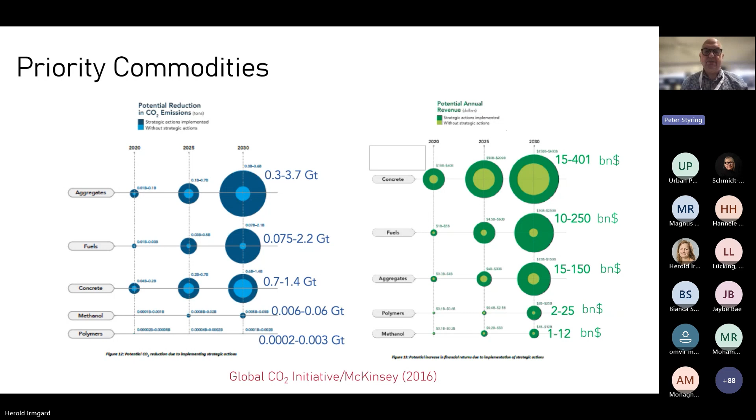I just want to go quickly into what we really need to think about now. This is a theory put forward by Peter Thiel back in 2014, about how we build new technologies. On the x-axis you've got globalization, where you have a potential product and you grow it up to a value N.

I think something's missing there—the N should be time dependent, so it should be dN by dt. How do you get there at speed? On the y-axis is technology, the 0 to 1. You start off with something conceptual, in your mind, and then you go to 1, which is the starting point for any business. Once you've established yourself, you can start looking at globalization, which is the growth.

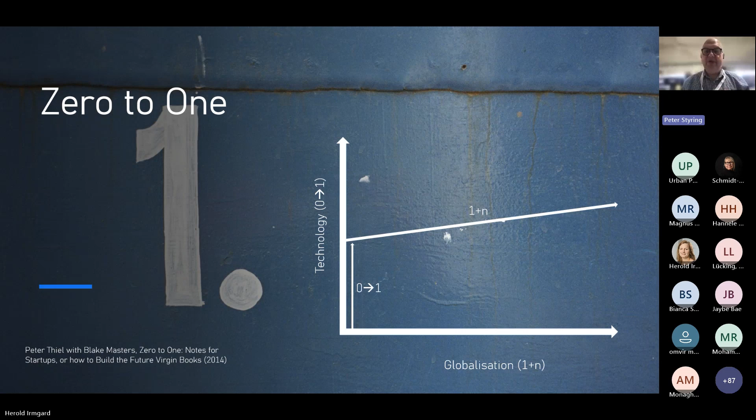Next slide, please. And that's really where we need to look at now. So I want to give one specific example.

This is a project I've been involved in called Flue2Chem, where we're taking flue gas—initially from the steel industry, but as you may realize, UK steel industry has had a few problems recently—so we're also taking it from paper mills. You'll see Holmen Iggesund, a Swedish company, and UPM Biofore, a Finnish company with operations in the UK. We took emissions from those two factories, from the biomass conversion units, and looked to convert them into surfactants that could be used in home care products.

Next slide, please. Why are we doing this? Well, if we look at the chemicals industry, we have a predicted growth of around 2%, 2.5% per annum, which means if we take the 2020 value and project it to 2050, where we're expecting net zero, we're looking at 5.5 billion tons of chemical products being produced.

Now, at the moment, most of these are from fossil-based sources, as you can see from the black bar. But because we're going to net zero, we have to diversify and take those from CO2-based products, recycled carbon products, and also bio-based carbon products. The problem is that as oil dependency decreases, that 5% of the barrel that goes towards chemicals could easily be lost if we don't intervene now. Next slide, please.

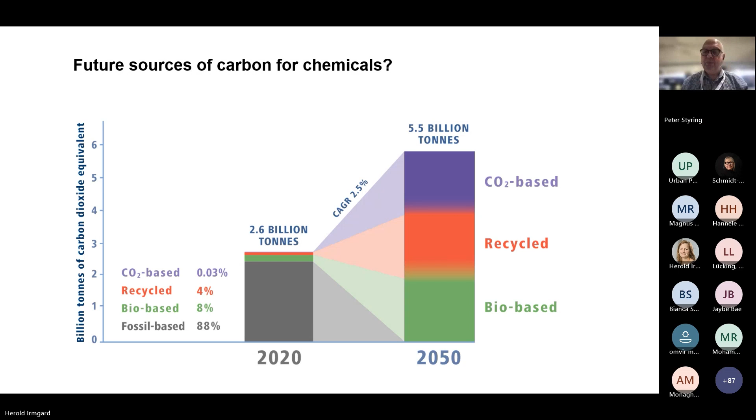So why did Flue2Chem come about? It was a long transition—it took three years to establish, and we were given two years to deliver a new industry. We realized net zero will not be achieved unless we look for another source of carbon. Carbon dioxide is one of the main contributors to global warming, and therefore, if we can use CO2 at the right scale and the right cost, we have a feedstock which is readily available.

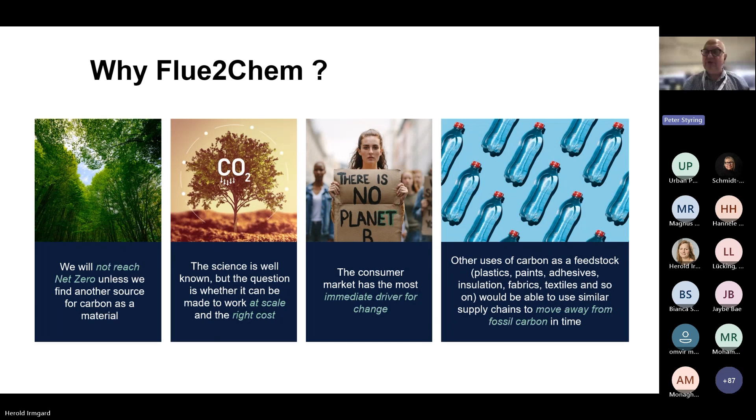The consumer market has the most immediate driver for change, so there has to be a social impact to this as well. But alongside CO2, we need to look at other feedstocks of carbon, including plastics and paints—the list is endless, and that's just on the carbon side. We also need to look at recycling other fossil-based products, such as calcium oxide, making calcium carbonate. Instead of extracting more calcium carbonate from the environment, can we produce it from waste stocks generated during the processes? Next slide, please.

I'm not going to go into too much detail about this—this will be on the slides as they're circulated. But why did we look at surfactants? Well, there is a huge market for surfactants, and particularly alkoxylated surfactants, things like alkyl ethylene oxides.

We want CO2 to be part of the value chain as a source from emissions. We want to convert it into hydrocarbons, to ethylene oxide, and manufacture the alkoxylated surfactants as we do the capture.

This is a unique project because we brought 17 partners together, most of which are competitors. You'll see there Unilever, who led, together with Procter & Gamble, Reckitt Benckiser, and Croda. These are usually competitors, but now we're working as a team. It was a £4.4 million project, of which 2.7 was grant funded, the rest being industrial leverage.

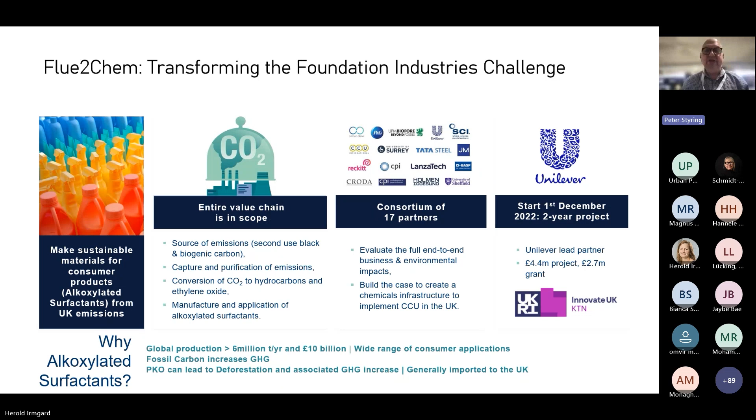The idea was to take these foundation industries, so Holmen, UPM, Tata Steel, and move forward to capture it using technology from the University of Sheffield, which is now patent pending and licensed to CCU International.

Carbon Clean weren't able to do any of the capture because of prevailing legislative issues, which is a huge problem. But then Sheffield, Johnson Matthey, BASF, LanzaTech, all making materials that would go into the final product, Croda producing the surfactants, and then the fast-moving consumer goods companies making the products, which we're going to announce in June in the Houses of Parliament.

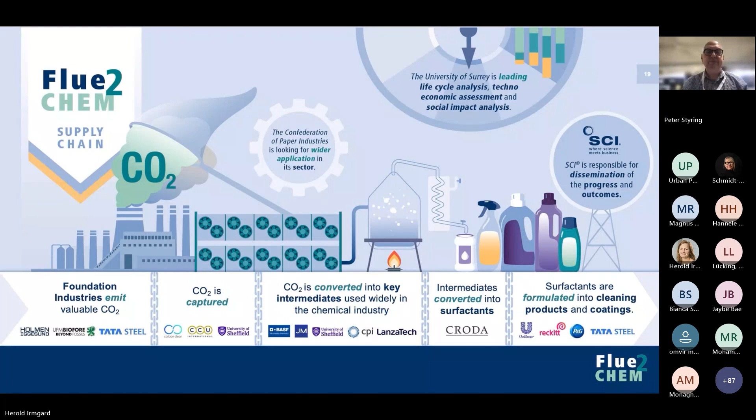This is just to show the commercialization is a long journey. The capture unit, the FluRefin system, is a pressure swing adsorption system. We started it in 2011. It's only recently started to go to capitalization. It's gone through a long history of development before we can introduce it to the market.

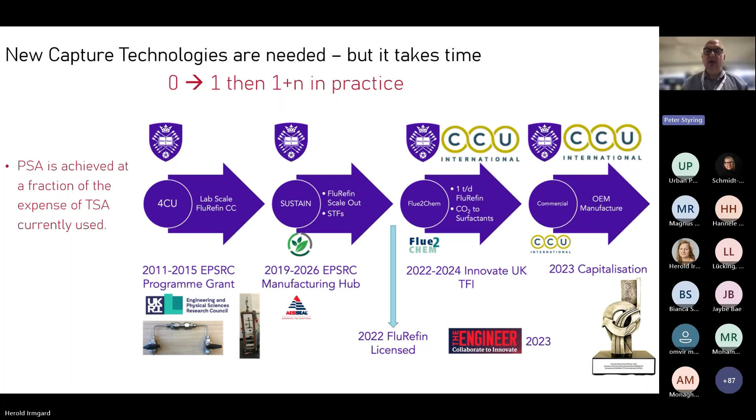But now, as we said, it's won awards - The Engineer, Collaborate to Innovate, and recently the iChemE Global Award for Startup Company of the Year. But how has that affected what we've done in Flue2Chem?

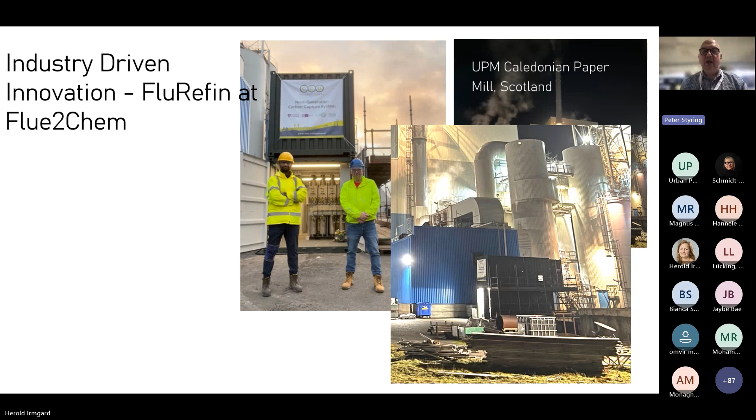What do we do with the CO2 that we capture? Well, we convert it into surfactants. In this case, the byproduct is also synthetic diesel, which you can use to power an engine. So we're starting to do it at scale. We now need to go to bigger scale.

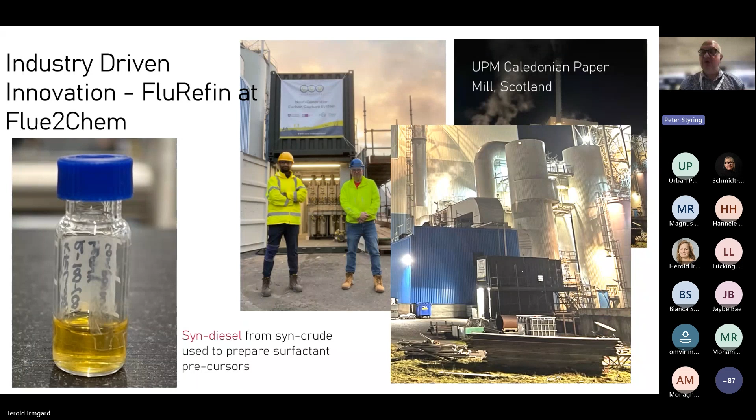Part of the issue is the regulations surrounding use of the different systems on existing power plants, because you have to go through a change of use protocol.

So to conclude, what have we learned so far from the Flue2Chem project in terms of how we go to industrial defossilization? How do we go towards net zero? The first thing we realize is we are going to need a lot of green hydrogen, not blue hydrogen, not black hydrogen, but green hydrogen. There is a possibility that we might be able to use white hydrogen or gold hydrogen, so geological hydrogen, but we need hydrogen.

Getting things to the right place is a challenge. We have to get things onto a site, and putting something new onto a site is full of regulatory problems. We couldn't make that synthetic diesel on site because it would have taken 2 years to get the permits through to do that, by which time the project would have finished.

Biology can't make you dodecanol, which is what we need. Thermocatalysis can, but it can't make a lot of it. The UK in particular is missing a lot of necessary scale-up facilities. That's not necessarily true in Europe, but something needs to be done on a European-wide scale.

Planning is good, but nothing can compete with engineers on site. You can do all the models you like, but you need someone with a spanner and a hammer to actually get the thing working. Regulation and fiscal policy needs to be better aligned with net zero goals. This should not be seen as a mitigation technique. It will help mitigation, but it should be seen as an enabling technology to allow the chemicals industry to survive in a net zero future.

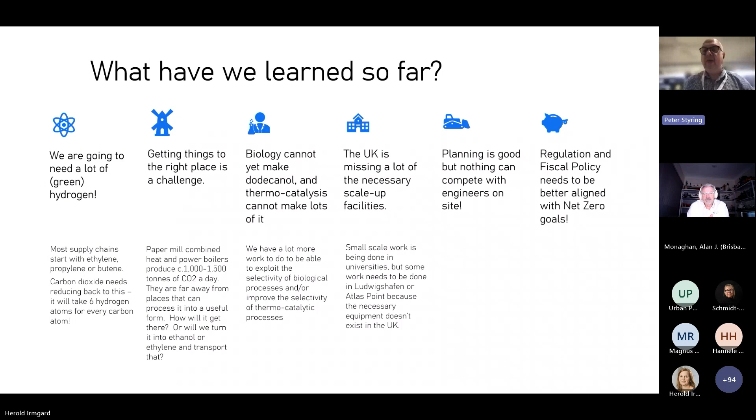And with that, I'll say thank you and happy to take questions.

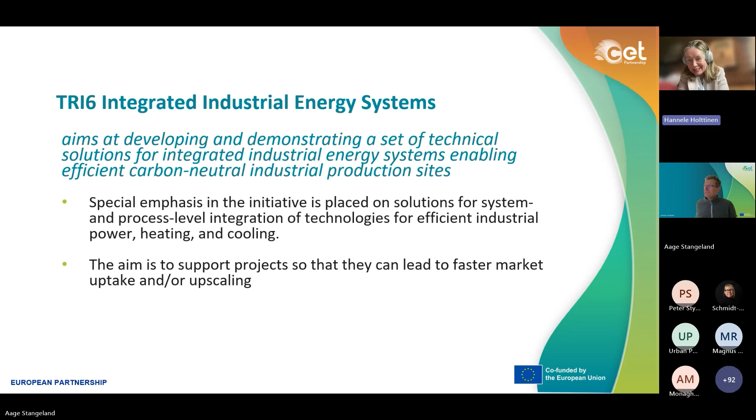Next, we have an example showing our knowledge community and impact maximizing event. We had two events together with our two focus areas on industrial systems and CCUS. We invited first Northern European and Central European industries to a 3-hour online workshop, and then had another event for Southern European industry. From these two events we made these summaries - we had two sessions, first looking at the research, development and innovation needs, and then the operational environment and market shaping. Åge, would you like to tell us more about the summary of the RDI needs?

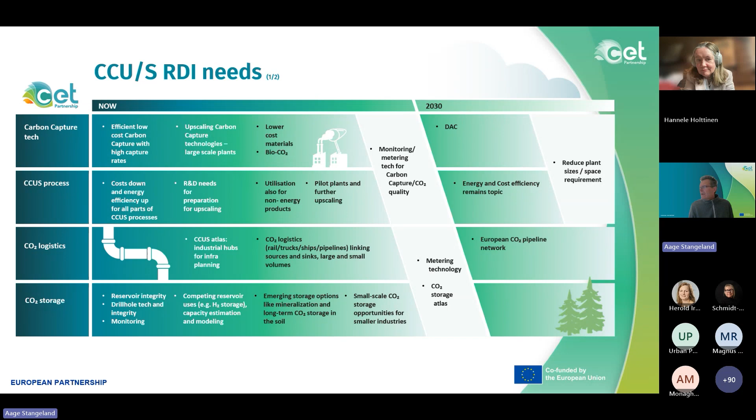We need to develop standards. When we transport CO2, we need good control of impurities and the quality of the CO2 stream, so we need to research that more. Environmental impact will also be important. We need good life cycle assessments and sustainability, and this should be part of all kinds of research activities.

Furthermore, cross-cutting topics will also be very important. One thing coming up on cross-cutting is artificial intelligence, a new technology that could be very helpful within capture, utilization, transport, and storage of CO2. Also on cross-cutting, we need capacity building. There's a need for labor requirements; we need to educate future experts. So it's, in general, quite wide aspects that we need to focus on, from capture to utilization and storage, and also the cross-cutting topics and business models.

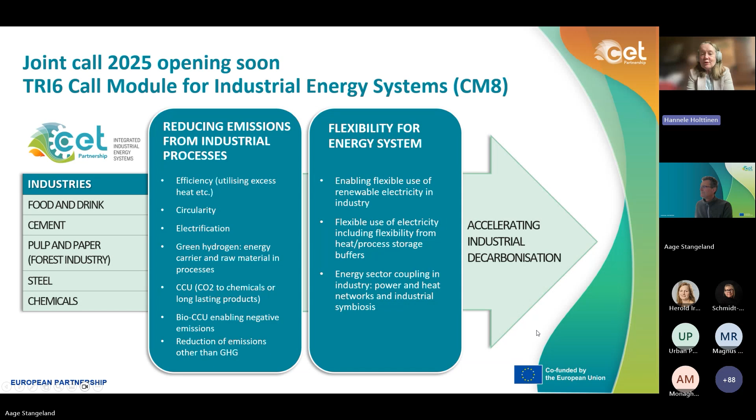So, Åge, what about your call module for CCU technology? Yes, I didn't include a slide for my call modules, but we have 2 call modules that are quite generic on CCUS, developing new technology, also addressing the cross-cutting issues that I mentioned. And we have 1 call module on hydrogen and renewable fuels that is also targeting technology development and the cross-cutting issues. So overall, the call has several call modules, so it will be important for all applicants to look carefully into each of them so that you can figure out which is the right one for you.

The added value we have experienced so far in ongoing projects is that we see that we can have larger projects when several countries join forces and put money on the table, and then we can have partners from many countries. The project grows bigger, and bigger projects will have bigger impact, not only on the national scene but also on the international scene.

We also see that the CETP calls lead to strong and well-functioning R&D and innovation collaboration across borders. And also we see that in ongoing projects, there's a strong relation between academia and industry, which is highly appreciated from our side. We also see that international cooperation already in the research phase will increase the chances for transnational large-scale implementation of CCUS later on.

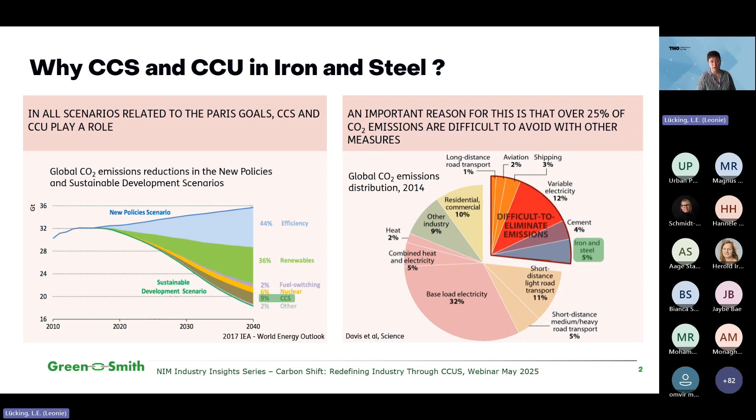And for this, generally what we see is there's a lot of emissions - per ton of steel, we have on the European side about 1.7 to 1.9 tons of CO2. The idea for how to go forward in general for the steel industry is to recycle more scrap - that's already something that's being done. Improve the efficiency of the iron making - that requires changes to the steel production process, even whole new furnaces. Switching of reductants - I think the most commonly known now is switching to hydrogen direct reduction. And lastly, capturing CO2. Within the GreenSmith project, we aim to address the last three of these.

Specifically looking at the capture of CO2 and permanent sequestration. We do this with what we call our StepWise technology, which is based on sorption-enhanced water gas shift. So in old terms, this would be called a pre-combustion technology - it's looking at gases that still contain CO and therefore energy, and what to do with this.

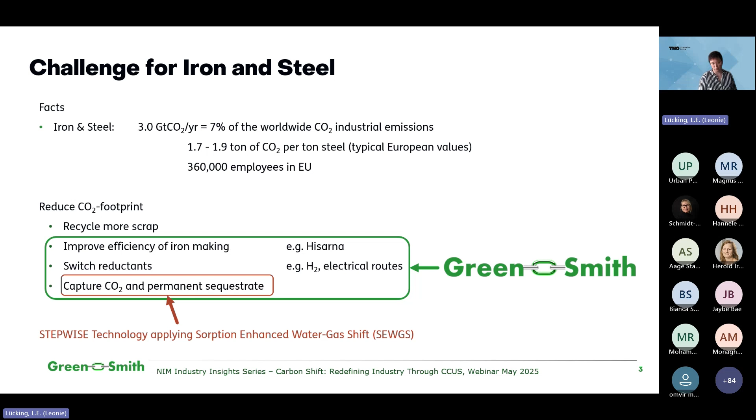In building up our technology, because I think this is also a very interesting part, is about how do you actually get a carbon capture technology high in its TRL. So we had low TRL projects along the line, but the most interesting ones, I think, are the higher TRL projects. So 10 years ago, we started the StepWise project, which looked at: can we capture CO2 from residual steel gases, and what is the performance? And actually, to our joy, we were able to outperform what we thought we would be doing.

So we had a low SPECCA, high cost advantage, and also a benefit of this technology compared to amine scrubbing is that it has better improvement on all LCA factors. So the material that's being used in this technology is basically a sort of clay, so it is leading to very little environmental impact, which is a massive benefit if you're looking at large-scale implementation.

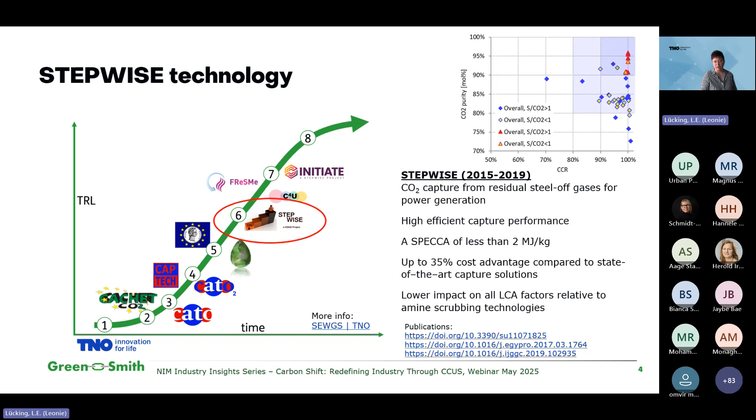Following this project, we looked at various versions of how to implement that in different ways. So we had the FReSMe project, where we looked at taking these off gases and turning them into methanol. The benefit of this is that we are reusing some of the CO2. The ratio is such that you will always have more CO2 than you can use with the hydrogen present in the gas.

But we were able to produce methanol from this. So all the way, we proved the production process to the point that we actually provided Stena Line with a certain amount of methanol, and they ran their ferry on this. So we really proved the full production chain, and also here we could prove that there's a positive business case for using this, rather than the standard process, which is just burning these gases.

In addition, we had the C4U project, where we looked at decarbonisation of the traditional steel mills. And we actually proved within a first-time demonstration that we could use decarbonised blast furnace gas to fuel the reheating furnaces. So in effect, decarbonising the later steps of steelmaking.

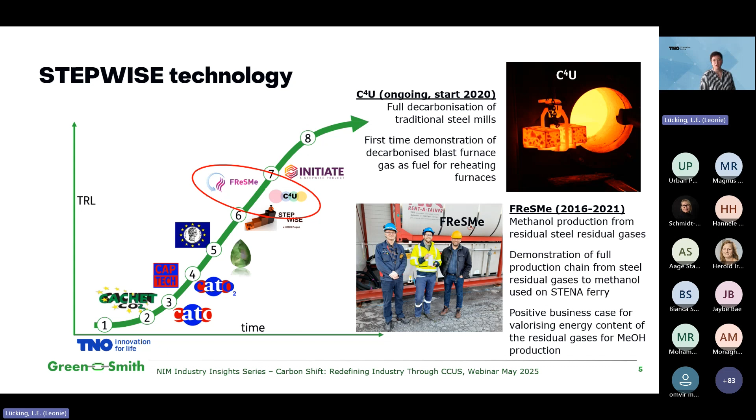Lastly, now we are currently in the stages of the Initiate project, where also in the shape of CCU, we are looking at combining and doing industrial symbiosis between the iron and steel sector and the ammonia and urea industries. What you can see on the images there is the erection of the reactor columns that is needed for our technology.

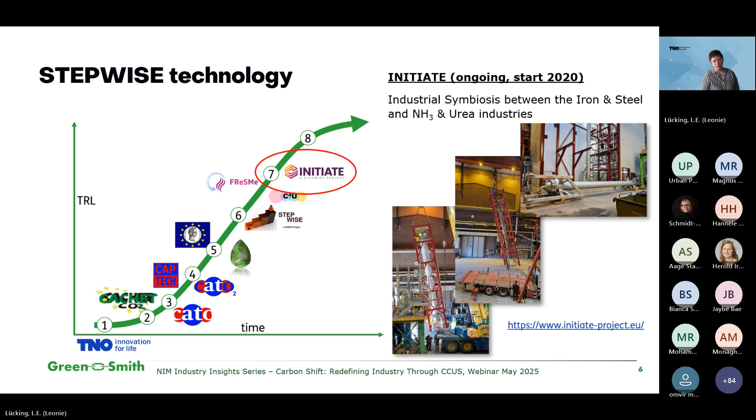Just to give an insight into how this Initiate project works: it's basically by creating a symbiosis, we are able to use the off gases that have a favorable nitrogen-CO content to our advantage to produce ammonia and then urea.

This is because our technology converts CO with steam together to CO2 and hydrogen. It then separates the CO2, so we have a nitrogen-hydrogen mixture, which we then can convert into ammonia. And then lastly, in a step, we can actually convert it to urea, for example for the agricultural industry.

This process does still require sequestration, because the urea process, again, doesn't need as much CO2 as the traditional steel mill produces. But some of the CO2 is actually utilized in the urea.

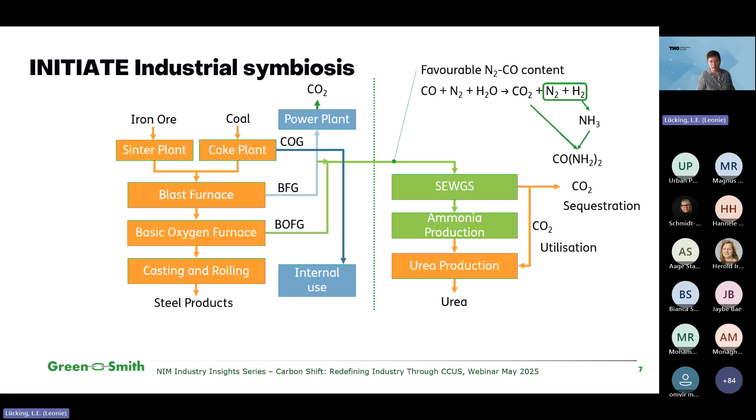We finished a business study to identify what the cost drivers are, and these are in the end what we see for a lot of our projects. First of all, what we see is that we have in general a net benefit in this business case. So as we discussed in the first presentation, it needs to become a benefit for the company to actually do this in order to drive it, that it's not just a burden.

What we also see, you can see this with the green arrows, is that the uncertainties at this point for this business study are rather large. They're mostly on the side of the benefits, meaning we were assuming that there might be more benefits. But things like, for example, the CO2 storage are a large uncertainty. Partially, part of that is impurities in the CO2, transportation, etc. But we also see on the benefit side large uncertainties, often coming from policies, etc.

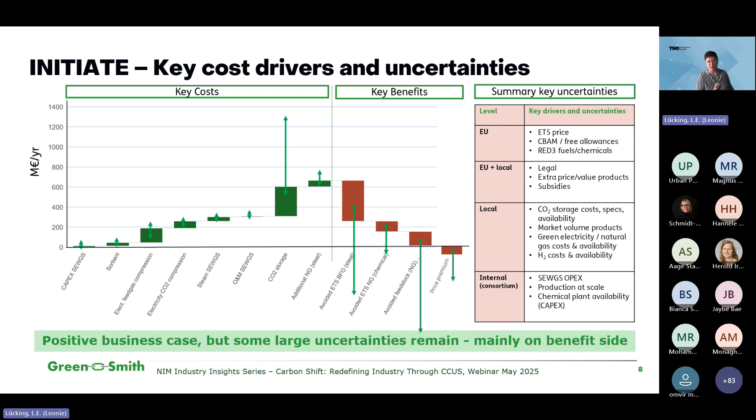But with this, I want to now talk about the GreenSmith project. The GreenSmith project is part of the CETP. And within this project, we want to demonstrate how we can use the stepwise technology as part of the Greensmith integration to have hydrogen and CO recovery from different integrations of the plant.

The idea behind this was that we look at the progression of the steel industry and how it can build. So we have the traditional steel mills with blast furnace and basic oxygen furnace. And if on site you want to slowly move towards direct reduction, which has an improved efficiency, how can we integrate these to get the biggest benefit? For example, can we use the off gases from the direct reduction route as input into our blast furnaces? And can we use the outlets of the blast furnace as input for our direct reduction?

So these were the thoughts with which we went in, in order to really reduce the need for carbon in the process, recycle as much as possible internally, and also capture to reduce the overall carbon footprint.

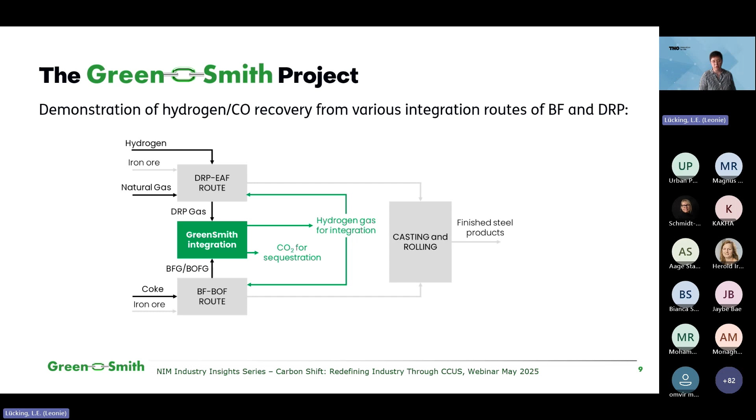The project itself started July last year. It's going until September next year. And our consortium, we always aim to cover the full value chain. So this means in our case, we have Acciaierie d'Italia involved, as a standard traditional production route, and Stegra, formerly H2 Green Steel, as one of the novel hydrogen DRP-based steel manufacturers.

We have technology suppliers involved. In this case, it is Kisuma who supplies the material for our technology, the sorbent that is needed inside our reaction columns, and Paul Wurth involved as an EPC that's strong in the steel sector.

And then lastly, we have two research organizations involved. That's from our side, TNO, as the developer of the technology, and Swerim, who are the Swedish steel research, or actually metal research institute that is closely connected, and it's also the location where we have our pilot plant that you saw in earlier slides.

The project aims to actually address all the scales of the capture capacity to improve on all levels, to get the best results possible. So on the gram scale, we are looking at improving the sorbent material. This is where heavily Kisuma is involved as a sorbent supplier.

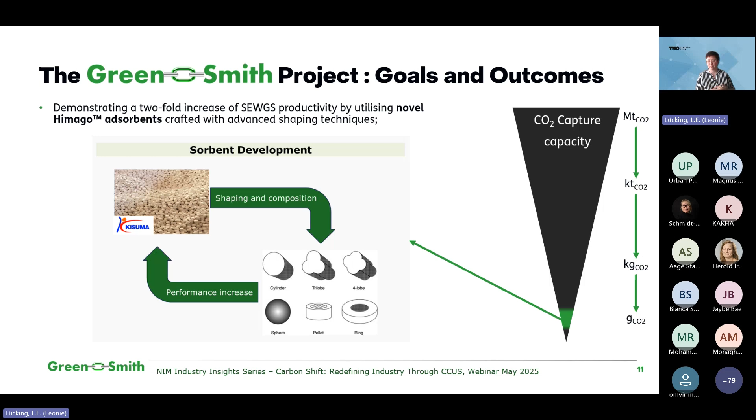On the kilogram scale, this is where we have on our site at TNO, a small version of our unit where we can do TRL 5 demonstration to showcase that actually these integrated production routes are possible, and showcase also the requirements when it comes to OPEX, etc., and to just demonstrate the possibility.

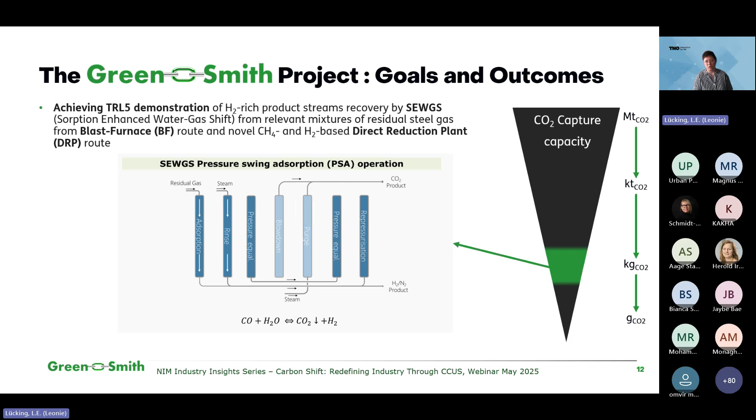On the kiloton scales, we're looking at doing a basic engineering design package to go towards a TRL 8. What we have seen is that a lot of the times it is difficult, the larger the plant gets, so the higher the TRL, it becomes more and more difficult to accurately assess what is needed. So when going into follow-up projects, etc., we do need to make an actual design of what this plant looks like when we're at the really large scale.

While the design package for a TRL 8 is currently looking at only 50 kilotons, the idea is that it can be a sort of modular system, so improving, we can increase the size simply through adding extra modules. But these, for example, give input into how can we roll out the technology, what is the requirement for on-site.

So on permitting, etc. We're trying to answer a lot of these questions there to really make the rollout as smooth as possible to go towards a first of a kind plant.

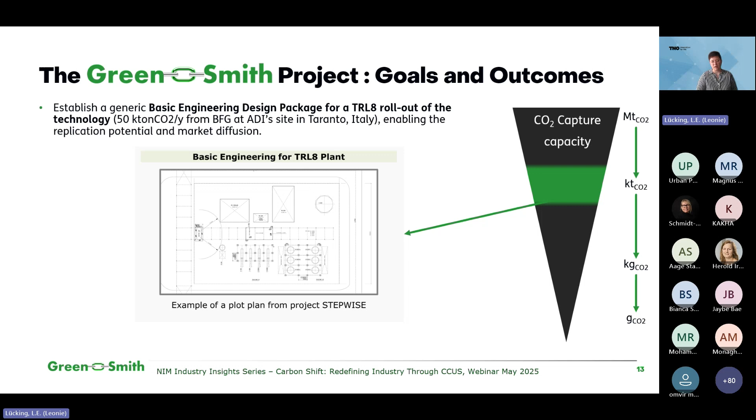And then finally, we have the larger scale, which is where we will do the techno-economics and the life cycle analysis for two sites. This is for the two end user sites, so ADI and Stegra, with the idea that we always, in every step of the way, when we do our technology development, we always include these steps to make sure that any changes we do actually have an impact.

So if we are talking about, for example, changing the shape of the sorbent, is the benefit significant for the cost, or do we need to rethink this? Is this really worth it? Similar with the life cycle analysis. This is one of the learnings that we apply to every project, that we need to have those elements involved there to prove to end users, etc., that it is a worthwhile technology.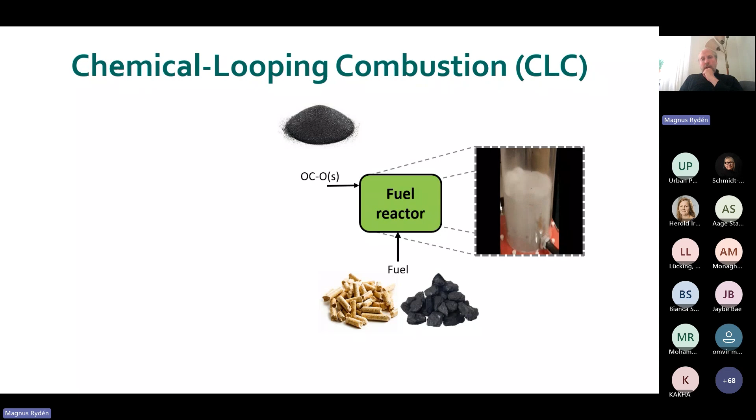So let's use simple gases and oxygen carriers as an example. Fuel, in this case, we use methane, and oxygen carrier would be hematite, that's simple iron oxide in this case.

At suitable conditions, if we have a temperature of say 900 degrees, the fuel will actually react with the oxygen carrier and form carbon dioxide and steam. We will also then get a reduced oxygen carrier, in this case magnetite.

This reduced oxygen carrier we can take to a second reactor vessel. This is also a fluidized bed, which we fluidize with air. At proper conditions, the reduced oxygen carrier will be oxidized and we will get back our hematite. If we do this in a circular fashion, the total reaction of this two-reactor system will be combustion of our fuel with pure oxygen. Heat is generated in the air reactor, while the fuel reactor is largely adiabatic.

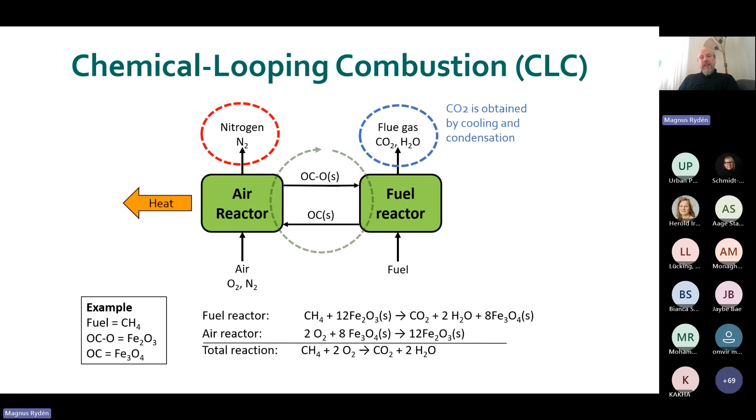And what have we achieved? We have achieved that we are never mixing air and nitrogen with the flue gas which we generate. So when we just cool down the flue gas from the fuel reactor, we will obtain more or less pure CO2 simply by condensing the steam.

And how can you build a reactor system like this? Something like this is the simplest way we can realize it. We have an air reactor, a fuel reactor, a cyclone, and two things we call a loop seal.

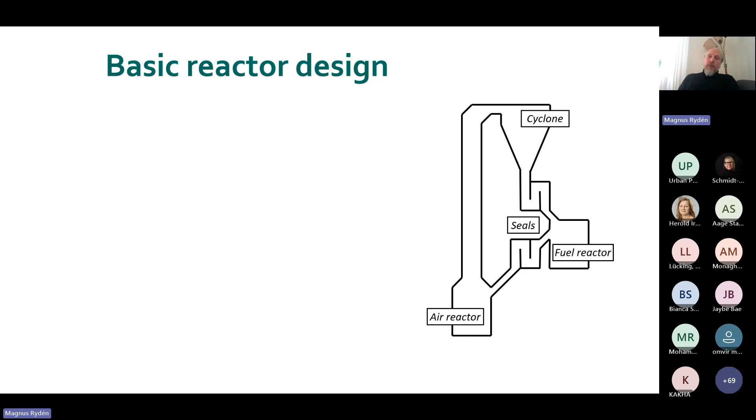We fill these reactor vessels, which are then fluidized beds, with our oxygen carrier particles, which is in the form of sand-like particles, size perhaps something like 0.1 to 0.4 millimeter.

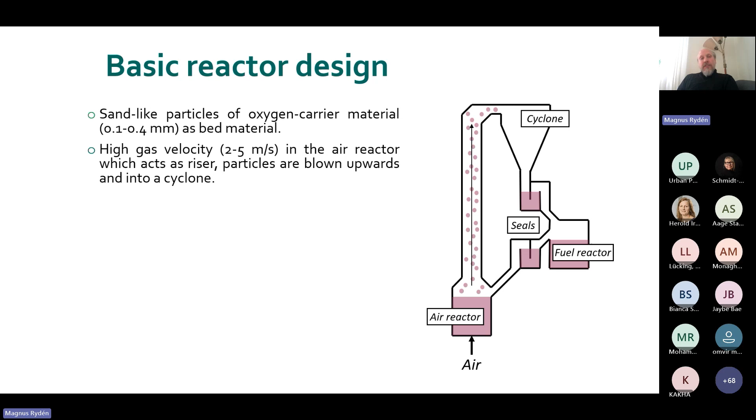The air reactor part we fluidize with high gas velocities, 2 to 5 meters per second. This means that we will actually blow these sand-like particles upwards, so this will act as what we in fluidization call a riser.

These particles are then captured in the cyclone and transferred downwards in the system simply by gravity to the fuel reactor, where we are reducing it with our fuel.

The loop seals in between the reactor parts work essentially as the water seal in a toilet. It prevents gas leakage between the two reactor parts. Everything here takes place at near atmospheric pressure and temperature in the range 800 to 1000 degrees, so these are about the same conditions as we have in an ordinary combustion facility.

There are many variants on this reactor system, but this is, I think, the simplest one, and if you just explain briefly how it works, I think it serves its purpose.

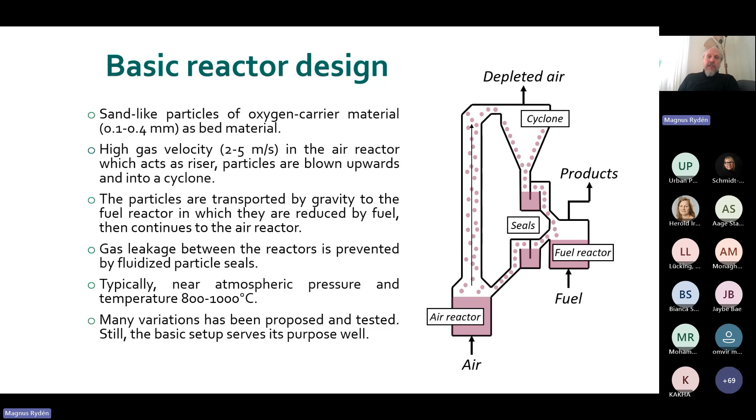So is this some kind of rocket science? Turns out it is not. This is very similar to our regular boiler technology, which is called circulating fluidized bed combustion. This is a common combustion technology used for solid fuels, especially biomass-based fuels, waste incineration, and also lignite. Only in Sweden, we have about 40 circulating fluidized bed boiler plants. So this is a common concept.

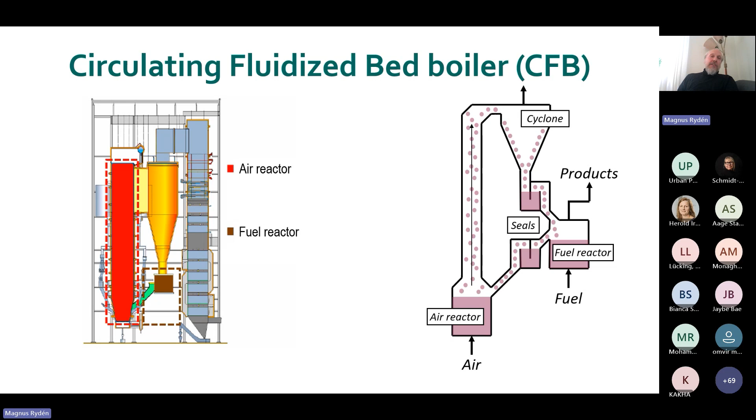If we look, this has all the parts which the chemical looping combustion system needs. The furnace in the CFB boiler will be our air reactor, and the particle seal will be the fuel reactor, but of course it will need to be redesigned significantly. In principle, the size, gas flows, heat transfer surfaces, and so on will be very much the same in a CFB boiler as in a CLC boiler.

So why would we bother doing this? The reason why we want to do this is to reduce the cost of CO2 capture, and we could do this very significantly with CLC compared to post-combustion. In theory, since we don't mix air and fuel, there is actually no energy penalty compared to conventional combustion for CO2 capture.

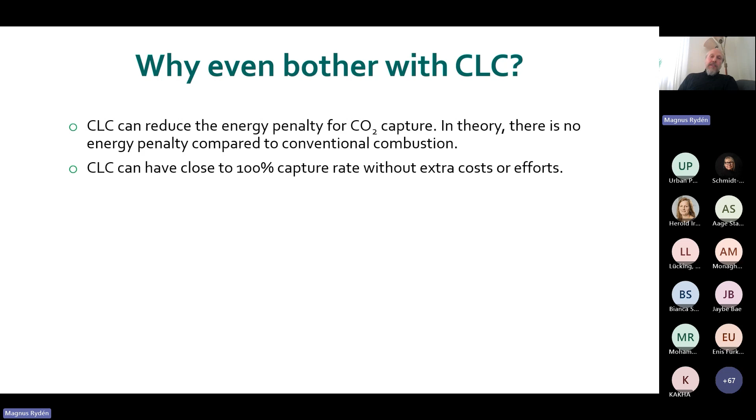We can also achieve high capture rate. For absorption-based technologies, you have some kind of diminishing returns when you reach very high capture rates. This does not occur for CLC, so here we can reach close to 100% capture rate.

We can achieve low capex and small footprint. As we have seen, the size of the facility will be the same as our regular CFB boiler, and capex correlates largely with size.

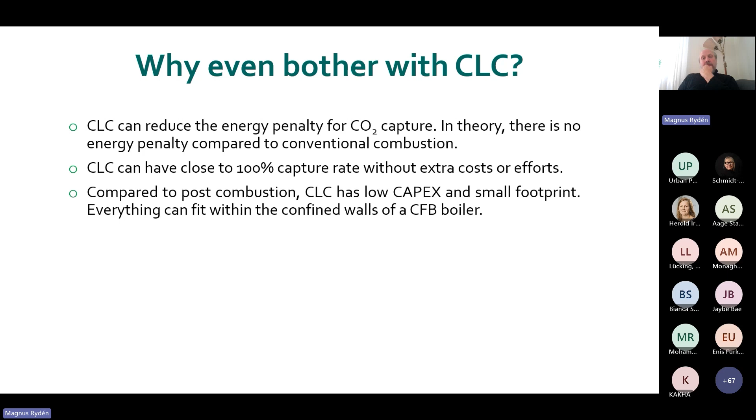We don't need any harmful chemicals. The oxygen carrier we would want to use is probably a mineral ore concentrate like ilmenite, which is iron titanium ore, or some iron ore, or even some byproduct from metallurgical industries.

There are many studies trying to calculate CO2 capture costs and so on, and they usually end up somewhere in the range 20 to 25 euro per ton CO2, which is at least a 50% cost reduction compared to amine-based capture.

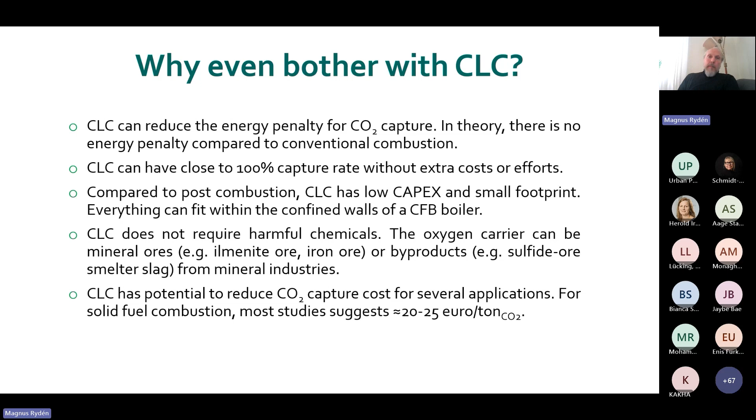So then let's move on to one of our current projects, which is the ACLOUD project, which is a CETP project. We are 3 universities in this project. We are the coordinators, Chalmers in Gothenburg. Our colleagues are

Technical University of Darmstadt and Åbo Akademi University in Finland. We have technology providers, Sumitomo Foster Wheeler, which is the leading provider of CFB boilers in Europe, and Alleima, which is the leading provider of tubing materials for boilers and superheaters. We have a consult company, CheMin, in Germany, which works with corrosion and improved operation of boilers. We have end users, Stockholm Exergi and Skövde Energi, which are providers of district heating in Sweden. And then there is the Research Institute of Sweden, RISE, which is a research institute.

The pitch is that in Northern Europe, where we are based, in Sweden and Finland especially, we have very large biomass and industries, pulp and paper, forestry, and so on. So for us, these biomass and forestry wastes are very important domestic fuels. And for Europe as a whole, waste-derived fuels also seem destined to increase in utilization in the coming years.

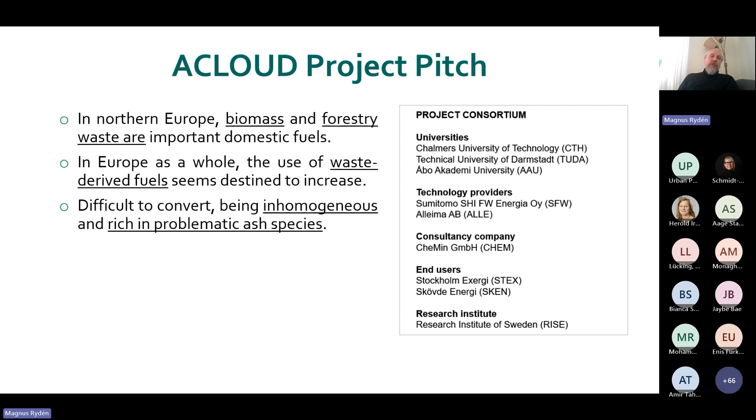We believe that chemical looping combustion would be an ideal conversion technology for this, due to several reasons. We not only have inherent CO2 capture, there is also the oxygen buffering capacity of the oxygen carrier. And also, importantly, which is the main pitch of the project, we separate the heat transfer surfaces in boilers from the problematic ash of difficult fuels.

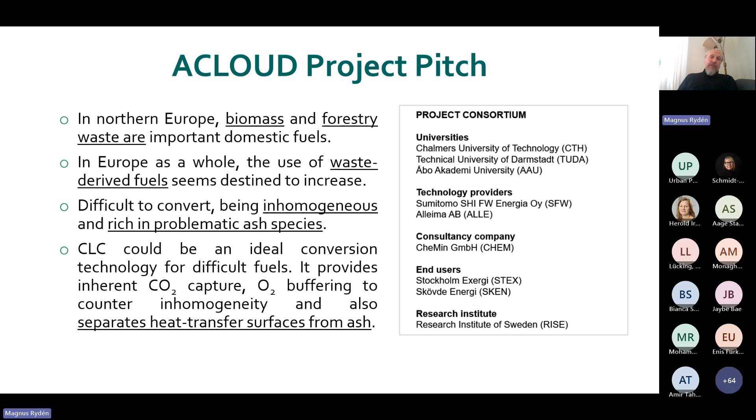So if we return to this figure, if we want to redesign our CFB boiler into a CLC boiler, we can notice that the red part here, the air reactor, and the black part, the convection section, are the cost driving parts of a CFB boiler, because here we have our heat transfer surfaces. In a CLC boiler, these red and black parts will actually be free from the most problematic ash species we have in biomass and wastes, which is alkali-related ash.

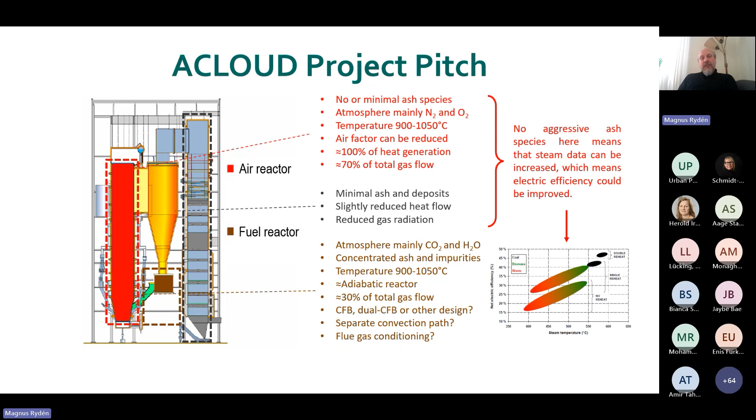On the other hand, we will have much more concentrated ash in the brown part here, which is the fuel reactor. So this is something we want to examine, verify, and make a viable design for in the project, with the ultimate goal of improving the steam parameters of our boiler, which will allow us to increase electric efficiency for our facility, in addition to capturing carbon dioxide.

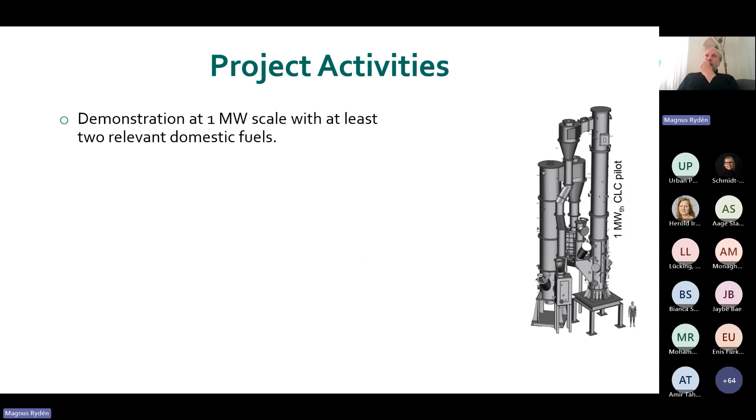And what activities do we have specifically in this project? We will demonstrate in a 1 megawatt scale plant 2 relevant difficult fuels: forestry waste and waste-derived fuel. We will also work on pilot scale.

These are smaller reactors, and here we look specifically at fuel conversion pathways and this important ash chemistry. We also develop new analysis tools, especially for ash measurements, which means that we want to measure potassium species, especially online during operation.

We also have corrosion and material studies on both these pilots, the 1 megawatt and 10 kilowatt pilots. This is then to examine if we can increase steam temperature for improved power generation.

And we also have a work package about economic performance, environmental impact for key applications, and techno-economic analysis. We look at key applications, which is waste to energy and combined heat and power.

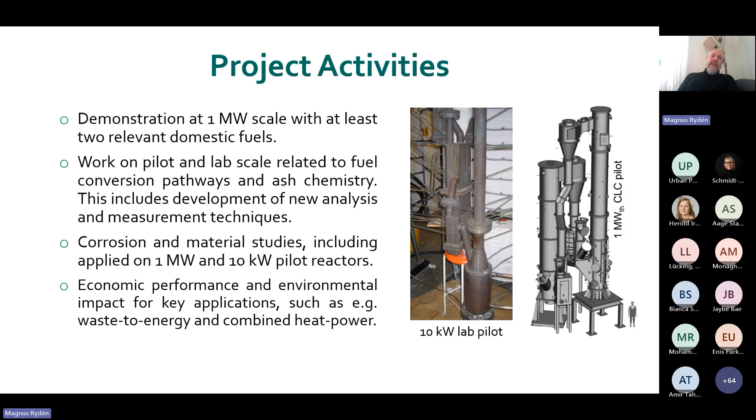For current status of CLC globally, this is not a new concept. It has been around for 20 years without reaching its full potential. Nevertheless, it has been demonstrated in more than 50 different pilot reactors all over the world. But we have about 80% of the experience here in Europe. So we still have done a lot of development related to this concept.

The largest demonstration plant which has been built is in China, which was taken into operation in 2024. It's in the 5 megawatt scale, which is not really, not even a semi-commercial scale, I would say. However, most of the other 12,000 hours of operation is in lab scale, then 0.1 to 100 kilowatt scale.

In Sweden, we have actually demonstrated the full chain logistics for oxygen carrier materials by operating more than 12 full-scale boilers with oxygen carriers. This has not involved CO2 capture, but we have demonstrated logistics and ash handling and so on. This is then to improve performance of conventional boilers.

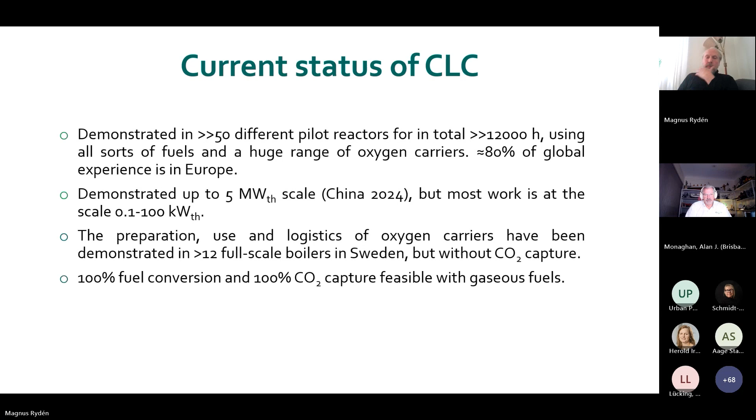We can easily achieve 100% fuel conversion and 100% CO2 capture with gases. With solid fuels, we have a more challenging situation, but good things to aim at is well above 90% of both these key metrics. And then there will need to be engineering to engineer the flue gas handling system of this.

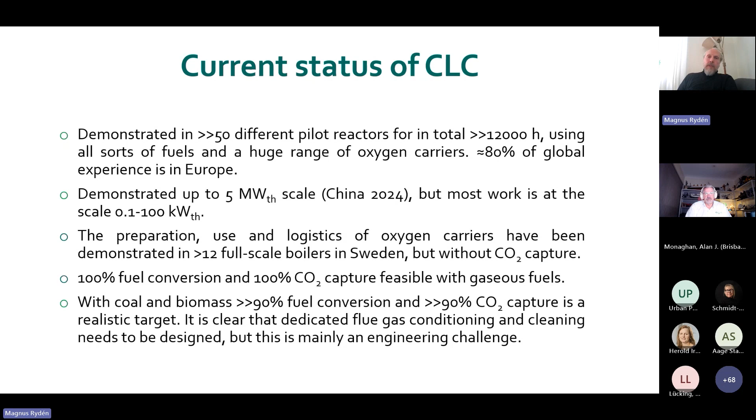My final slide, takeaway specifically for this audience: CCUS, chemical looping combustion, I believe represents a good midterm possibility if we want to significantly reduce cost for biogenic CO2 for utilization. However, it needs to be integrated with solid fuel combustion, it cannot be applied universally. This can be combined heat and power, waste incineration, or perhaps bark boilers on pulp mills.

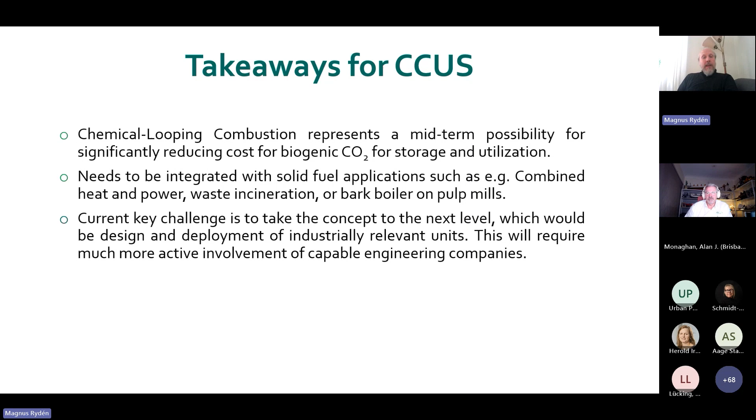Key challenge is to take this to the next level, which is design and deployment of industrially relevant sized units. And this will really involve more active involvement of capable engineering companies. Up to this point, this has been hampered by, if we look at the situation here in Sweden and Europe, most potential customers of CO2 look at off-the-shelf technologies rather than trying to develop this technology into its full potential. So any help and ideas how to realize this final step from the audience would be very much appreciated.

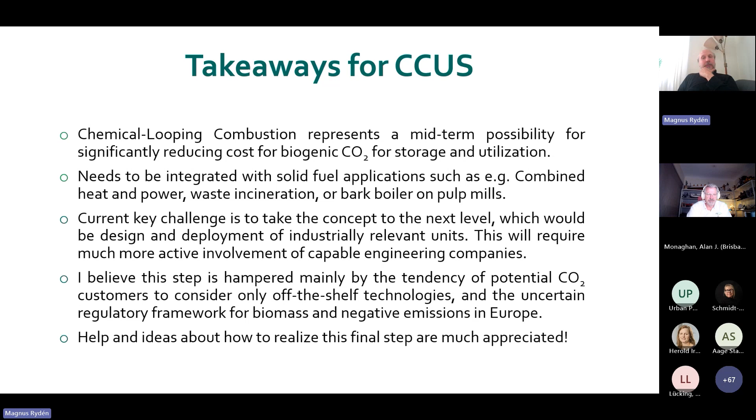And that concludes my presentation. Thanks a lot for your attention.

Excellent. Thank you so much, Magnus. Your last slide of takeaways there actually stole two of the questions I was thinking about asking you. But I do have one here: how do you actually envision the CLC technology to best be integrated with CO2 utilization?

Yeah, mostly historically, we have looked a lot about CO2 storage within our research environment, just for climate benefits. But lately, there have been several projects started where actors who want to make electrofuels, for example, are making agreements with the kind of mid-sized district heating providers we have in Sweden, which utilize biomass. And then they are looking mostly at off-the-shelf technologies. But if there is a true interest in making these electrofuels at this scale, which there are several, at least on paper, projects in Sweden at the moment, then I would say that this would be the best environment to try to take this technology to the next level.

That's my hope. Excellent. We have another question that's come through: what is the target capture cost per tonne of CO2 in the CLC project?

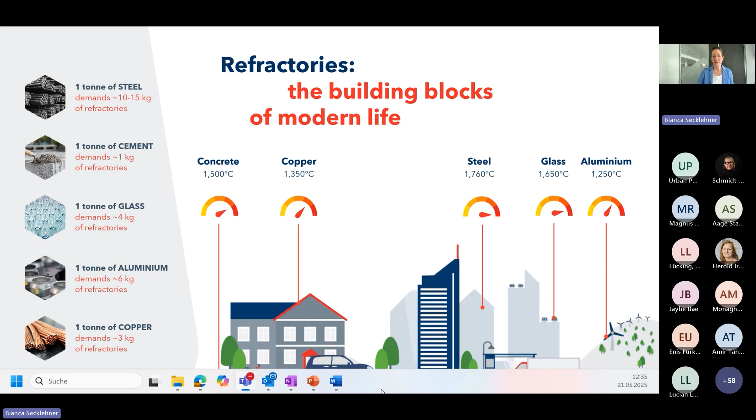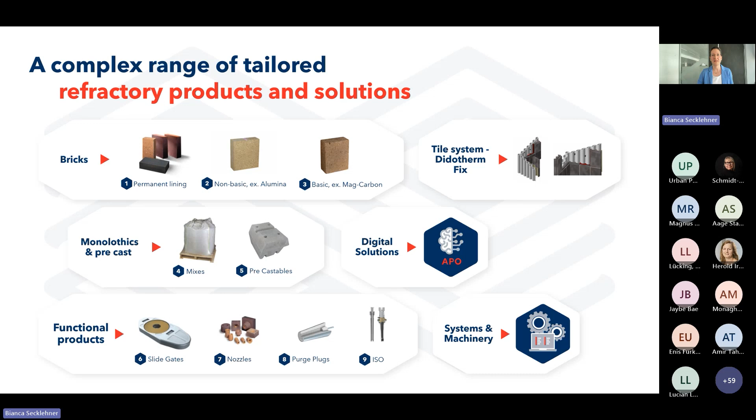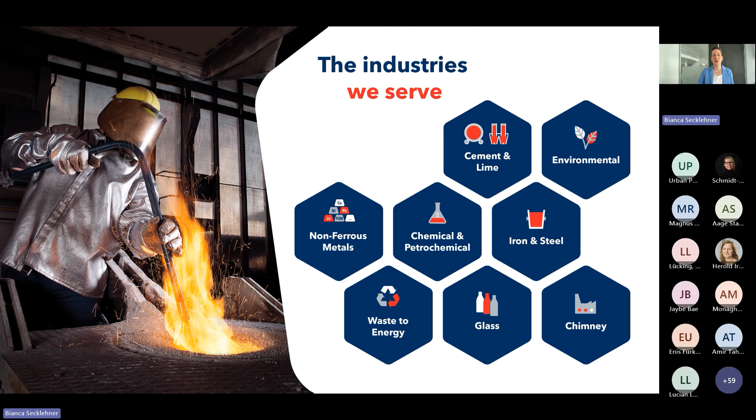How do they look like? On the next slide I have a few examples. They are either produced in different shapes of bricks, or sent to our customers as monolithics and applied in their vessels, or as precastables or functional products. The industries we serve are mainly iron and steel, but also cement and lime, non-ferrous metals, waste incineration, and glass production. They all need our products.

I want to show you why exactly refractories fall under the hard-to-abate definition. Hard-to-abate, for example the cement industry, but also we as a refractory producer fall under this definition, because compared to other refractory producers, we are highly backward integrated, meaning we produce the majority of our raw materials ourselves.

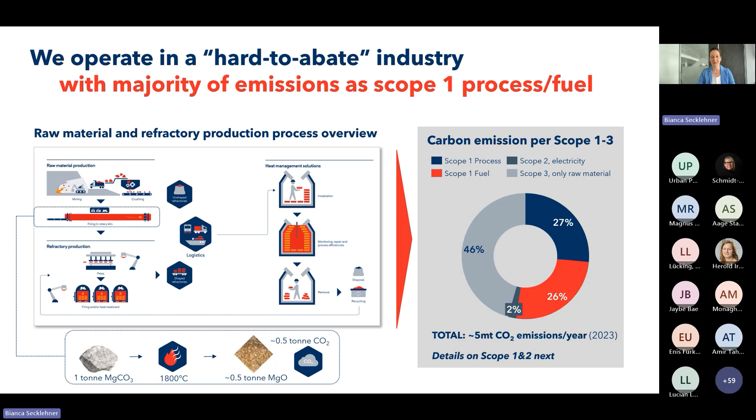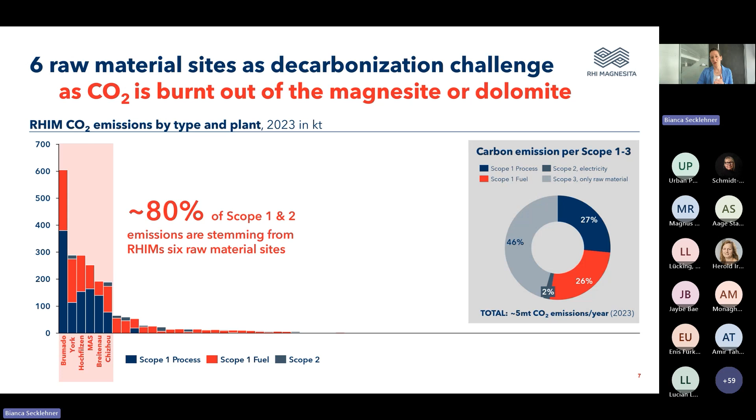RHI Magnesita wants to lead the industry, not only in terms of products and systems, but also in terms of decarbonizing our operations as fast as sustainably possible. We invest a lot of money in projects like this mineralization project, which I will discuss in more detail in the next slides. We are continuously increasing our recycling rate to avoid CO2 emissions in the first place.

We are very transparent with our customers. We show our carbon footprint on all our technical data sheets of our products, so customers are aware of our carbon footprint. And we work very closely together with industry partners who have the same challenges as we do, to develop new renewable energy solutions and also hydrogen energy networks.

In our yearly report, we have already published our 2030 sustainability goals. Here it has to be said that sustainability is not only CO2, but also energy efficiency. Safety is a very important aspect of our sustainability journey, and also sustainable supply chains.

On the next slide, you can see an overview of the options that we as a company have to reduce our carbon footprint. Firstly, we want to avoid CO2 emissions as much as possible, but based on the raw material that I showed in the first slides, we cannot avoid them totally.

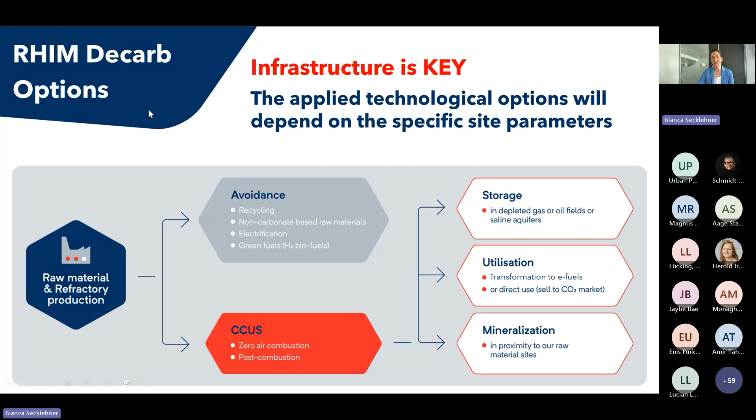On CCUS, we have two FFG funded projects running. One is Abate-C, where together with a Chinese university and the Montan University of Leoben we are investigating options in the Anhui province for whether it would be possible to store the CO2 of one Chinese production site. And we have the CCU Upscale project, which I'll go into detail on in the following slides, also FFG funded, with several partners working together with us. One very important partner is MCI, Mineral Carbonation International, who brings this mineralization technology to the whole project.

The general process is set up so that we take the flue gas as is from our rotary kiln, with about 15% CO2, and let it react in a reactor together with a feedstock, in our case serpentinite, which is milled and heat-treated to then react with the CO2 from the flue gas. We get two output products: a siliceous product and a precipitated magnesium carbonate. I will go into detail on the feedstock, the product, and the in and out mass balance, starting with the feedstock.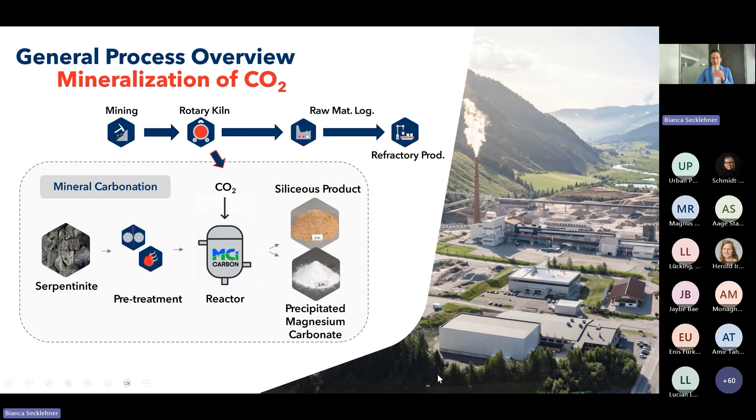We decided to go with serpentinite because it's available in large quantities and abundant worldwide. What's tricky so far is that current applications of serpentinite have never made it necessary to check its chemical and mineralogical characterization. This is something we put a lot of effort into, because the mineralogical composition affects the whole process significantly—the abatement potential and the product specifications depend on this feedstock. So we take a close look at taking the right quality from these serpentinite pit mines.

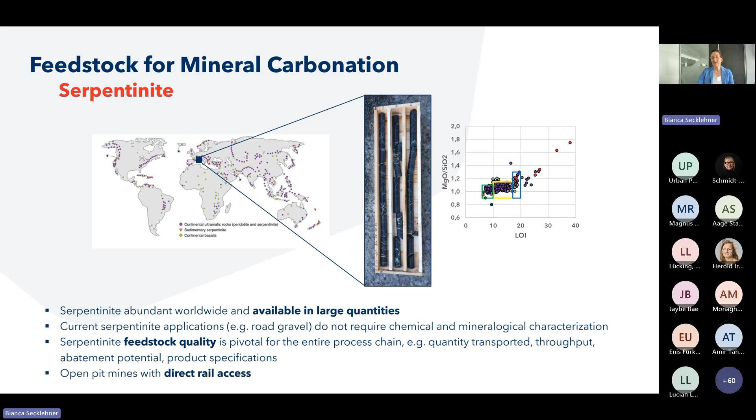The products coming out of this mineralization process are, on one hand, a silica-rich powder—very fine—and an MgCO3 product. We see multiple applications in the building sector, such as refractory ceramics, but also in plaster and cardboard, fertilizers, or paper production. Compared to a mere CCS option, where we would only store it with just a cost, here we see the real benefit of new business opportunities, where we could sell these new industrial minerals to potential customers.

Apart from this aspect, it's also very promising that this is a very energy efficient process. It runs at low temperatures and pressures. We do not need any additional chemicals for this reaction process, and we can take the CO2 directly from the off-gas of our rotary kiln.

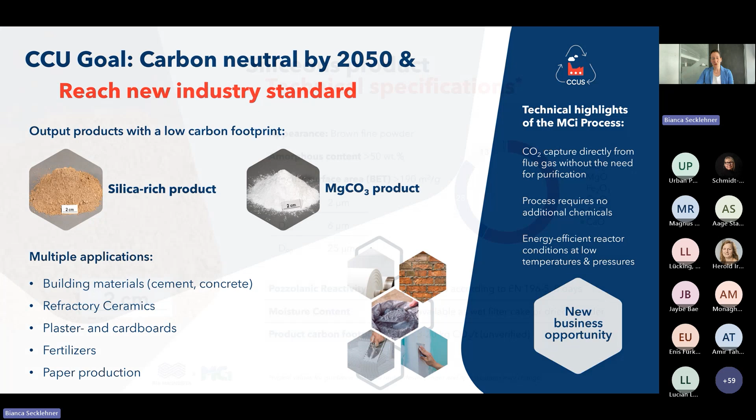So, more detail on the products—there are two more slides. First, the siliceous product, so you can understand it a bit better: it's really fine, 90% below 25 microns. We have an independent lab testing the reactivity and activity of this material, to check whether it would be suitable, for example, for the cement industry as a supplementary cementitious material, and the results here are really promising—it seems to be really reactive.

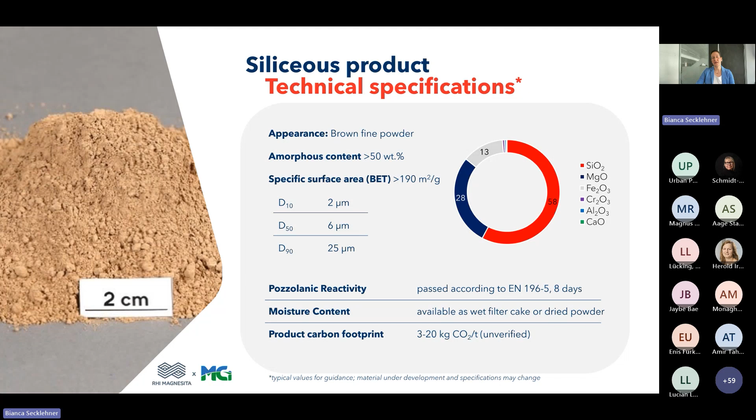What's still outstanding are the durability tests—we're still waiting on those results—but overall we are also in discussion with potential customers, and it looks really promising that this could substitute clinker in the future. It's a very fine material, with amorphous content of about 50%, and that's the siliceous product. The other one is the precipitated magnesium carbonate, also very fine—90% even below 18 microns.

It has to be stressed that it's really white, fine powder, and it comes in different mineralogical compositions. There are also several applications where we're looking into them, which will be seen on the next slide.

On both products, it can be said that it comes out as a wet filter cake, and if it can be used as a filter cake, the carbon footprint is rather low. If we do have to dry the product, this carbon footprint would go up again. But basically, if our customers could use the wet filter cake for their production sites, it is a really low carbon footprint mineral product.

So on the feedstock, the products, I've given you some details here, the key developments. Basically the technology is running in a pilot version since 2016 in Australia. The next scale up that could save 1,000 tons of CO2 per year is currently under commissioning, also in Australia.

And this is also the basis for our planning of the first commercial pilot in Europe in one of our Austrian sites, where we want to capture 50,000 tons of CO2 per year. This project, the CCU Upscale, has also won the Net Zero Industries Award at COP29 last year, and has this funding aspect as well. So these are the key developments.

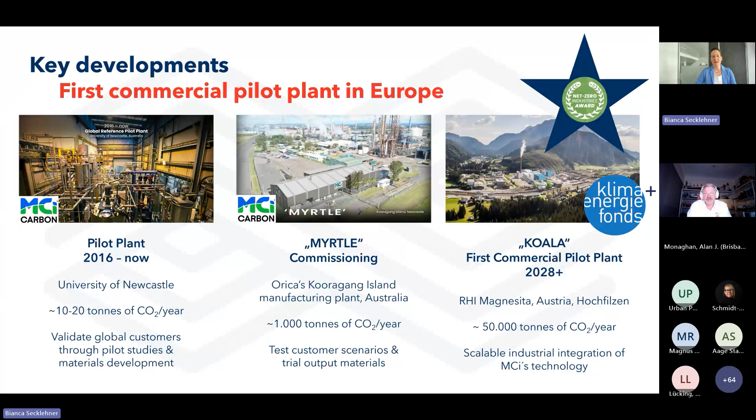We are really proud that we are working on the first commercial pilot here on this mineralization technology. One last slide before I come to the end is about the in-out mass balance, to give you an overview.

So if we want to capture 50,000 tons of CO2 of the flue gas, we would mineralize it together with a serpentinite and get 2/3 as the siliceous product, where we could find applications, as I said, in the cement industry to reduce the clinker rate if we can increase the usage up to 20%. This looks very promising to be suitable for this industry.

And the precipitated magnesium carbonate has several applications. Some of them are already kind of accepted for EU ETS counting. So for construction products, this counts as permanently bound.

Am I the only person who cannot hear Bianca speaking? I haven't heard any feedback. We can hear Bianca speaking. So maybe it's only Ellen. Yes, could be a local thing. Okay.

So 2/3 would be siliceous product for the cement industry, and 1/3 would be precipitated magnesium carbonate, possible for the construction product, but also for minerals, fillers, for different uses.

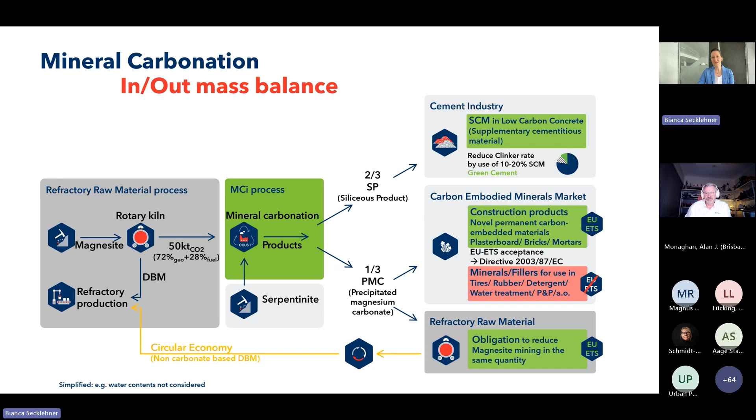We could also use this material in our own production process and substitute primary magnesite, which would enhance this circular concept of ours. To sum it up, we see this mineralization technology really as an option to turn CO2 into valuable materials, to have new fine-grained low-carbon products like the siliceous product and the precipitated magnesium carbonate.

We see various applications and are in discussion with several potential customers that could use these minerals that have a reduced carbon footprint, and we are establishing a lot of new cooperations to get this technology flying.

I'm not sure whether I understood it correctly. We use water in the reactor, so it's in a solution. Could you repeat the question? Oh sorry, it says: is it solid or aqueous CO2 mineralization? It's bound in a mineral, so the CO2 ends up in stable mineralogical phases. It's MgCO3 with water, but it's solid. These are stable phases, but it's a mineral.

Now, is it nesquehonite, hydromagnesite, magnesite - do you see those options? It's a mixture of those, dependent on the feedstock, but it's a mineral.

If there's a further question needed on that, please put it in the chat. The other question I have for you is how important are partnerships? It's been a big theme obviously - we're in partnership with the CETP for this presentation, but how important are partnerships or regulatory frameworks for RHIM in reaching its decarbonisation goals?

They're highly important, because for these two products we need customers and industries that are interested in the product itself, and we need to work together with them to understand whether the specifications are suitable for their applications. So collaboration with them is key, but also the legal framework needs to be reliable.

We need to know that this really counts - how do you say, like the EU ETS, in German it says 'es wird angerechnet.' What's the English version for that? I don't know - we get the certificates then, so it counts that we decreased our CO2, that we didn't emit it. And therefore the legal frameworks are also really essential.